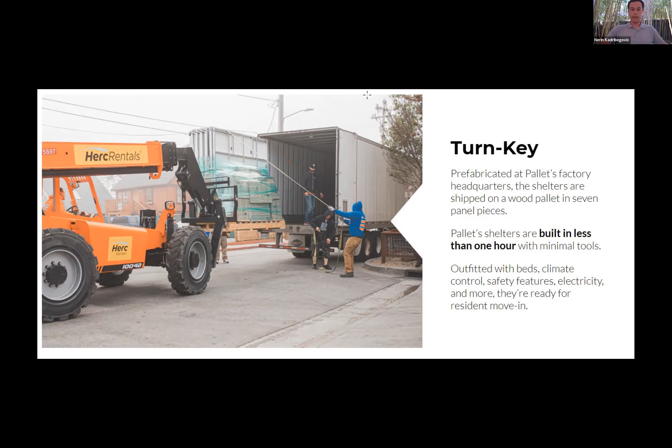Anyway, so going back to the tiny homes. So what is a tiny home? In this case, the tiny home villages are comprised of 60 square foot shelters, produced by a pallet shelter company out of Everett, Washington. They are incredibly fast to assemble—it takes about an hour to assemble one of these shelters. They are very affordable, starting at around $5,000, but you can add additional things to enhance them, such as air conditioning and heaters, and some interior furnishings, which all of our shelters have. They come delivered on a pallet, and come up very quickly.

So what we often talk about is that this company has really captured the sweet spot in between permanent housing and a tent, and even in the way it looks, we often talked about it as sort of monopoly houses, or a child's drawing of a house. It goes back to that primal hut that Michael was talking about earlier.

So this is a cutaway look, again from their website. And they ask on their website, well, where's the bathroom? This is explicitly a shelter. As Michael said earlier, this is transitional housing, not permanent, not a permanent home. So the bathrooms are actually done in the communal style—this is more of a camp.

But you can see, if you look inside, it's 8 feet by 8 feet, with space for 2 folding beds. During COVID times, all of these are occupied by a single person. Other components—you have some storage space underneath the bed, shelving in the back wall, and the critical components are the air conditioner at the top and the heater. The shelf can also double as a desk.

These are pictures of some of our units that are already completed and furnished. They also make a slightly larger unit, about 100 square feet, which leaves a little more maneuvering room inside. We have implemented these not necessarily for habitation, but for storage in some of our projects.

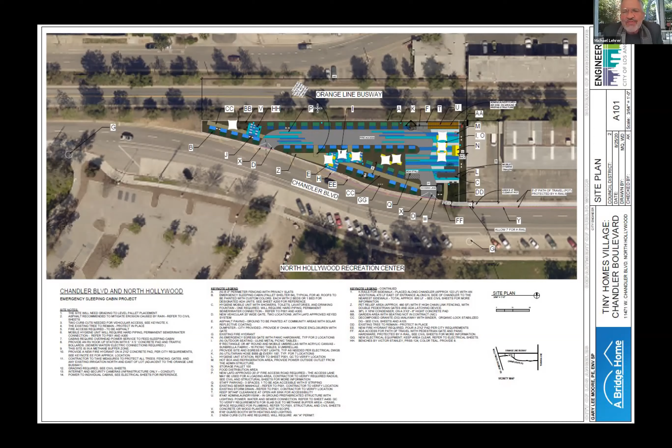I think this as a single idea really exemplifies it - if you want to lose 2 or 3 months to work with the fire department on that, you could save a bunch of money and you'd be finished. You'd begin construction 3 or 4 months later before the project opens. Those are real issues, really important to understand and explain.

So the Bureau of Engineering did all of this work, but they also have clients - in this case the council district and LAHSA, the Los Angeles Homeless Services Authority - and the flow of information between various city agencies is sporadic. So sometimes as architects you get information later than necessary, but they didn't have time to modify it. When we received this, they told us okay, this is it, but the administration trailer actually has to be in the front, among other requirements.

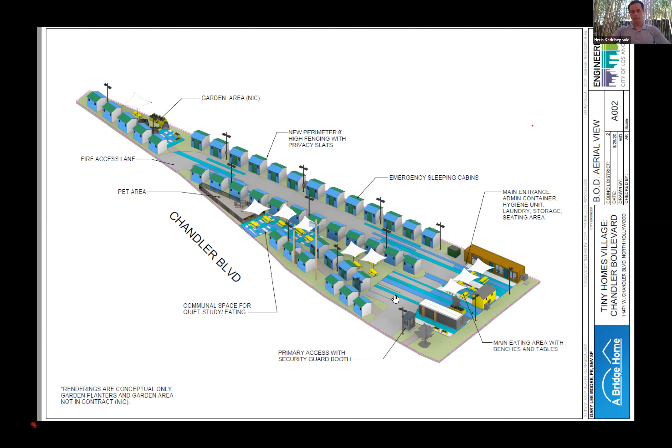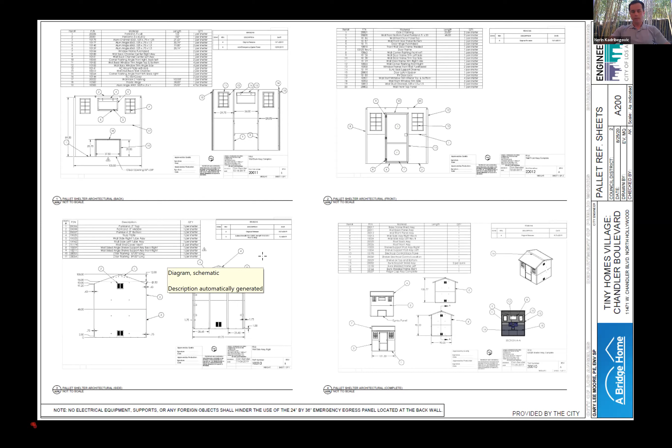In addition to all of that site planning work, these were the drawings that were part of our set describing the pallet shelter. You have to understand, we did not see the pallet shelter in person. We couldn't feel the material. These drawings were all we had. Once we actually looked at them very closely, we realized they're not that descriptive. They don't describe the relationships.

Because solving for accessibility and transitions between units is really important, we ended up having to have a Zoom call with the factory in Washington, where he took a tape measure to the threshold so we could actually design it properly.

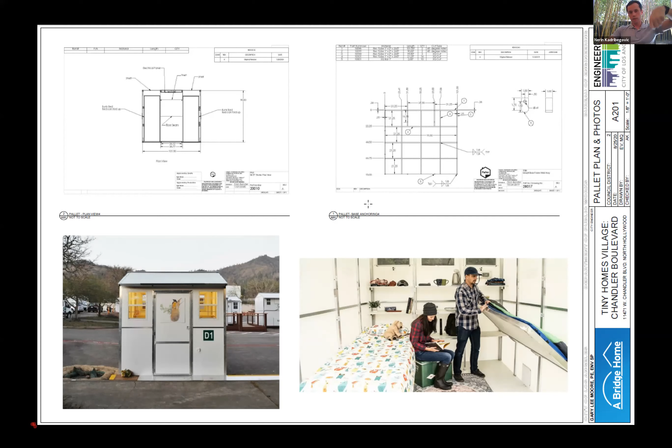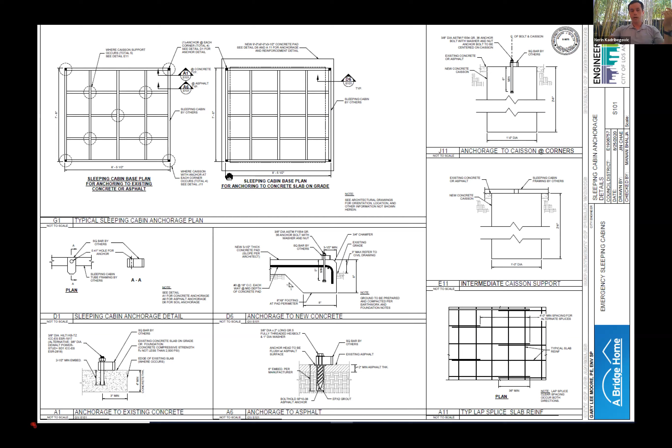In addition to all of those issues, BOE also negotiated with the Department of Building and Safety sets of conditions for foundation work. Our LADBS is very conservative, God bless them. So in this case, this is a foundation drawing — if we were to put it on existing asphalt or existing concrete, we had to drill 1-foot wide concrete caissons every 2 feet apart to put it under, which is very safe but seems like overkill given the situation. In other cases, they allowed us to pour a concrete slab on grade and then place the unit on top of it.

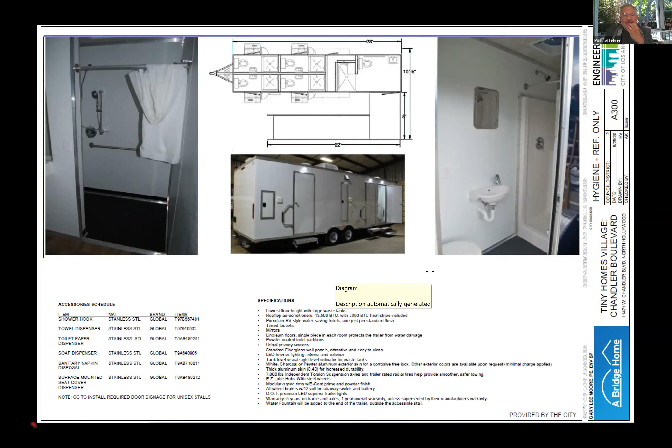Given the extremely fast schedule, we were desperate to get information. We had to move ahead to complete our drawings without actually seeing these units, looking for anywhere we could see them to understand what we had to do. That was sort of kind of freaking out and being desperate on one hand, but keeping moving ahead and being as ingenious as possible to try to figure out what these things actually were.

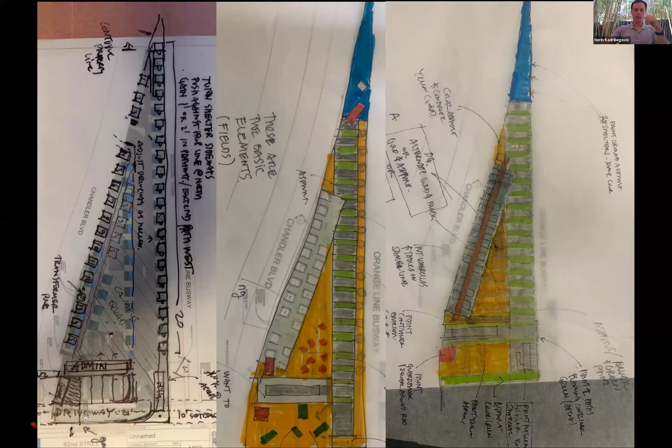So once we understood all of those conditions, we set out to redesign. This is all happening in real time, we're playing around, we're moving things — but the key discovery here was using that 10-foot setback for the driveway, because you can't put a building there, but you can actually drive on it. By doing that, we were able to buy 10 feet on the fattest part of the site, and we were like, wow, 10 feet, that's just incredible. And it opened up a number of other things.

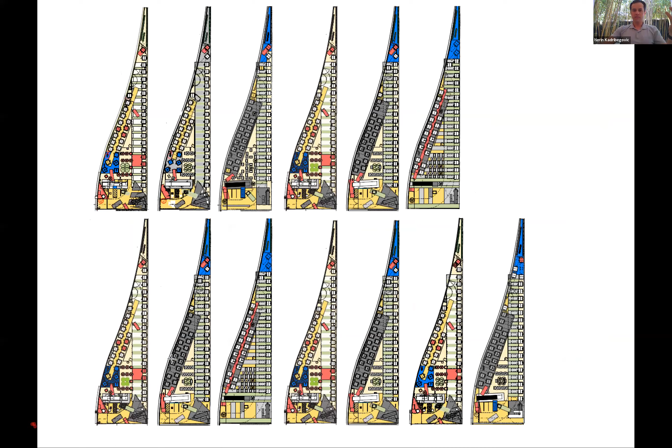And then we did a number of studies, not only color, but each one of these is driven by specific site conditions that we'll talk about a little bit more.

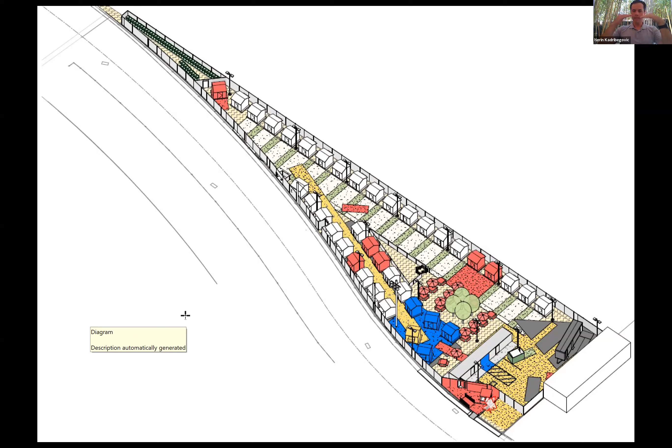Lowering the site by 1 inch, or raising it 1 inch, results in 100 cubic yards of export. So there were countless calls with the civil engineer, Barbara Hall, and our contractor and us, just trying to navigate and find that sweet spot where the export would actually match the bridging documents while still solving for all the other conditions.

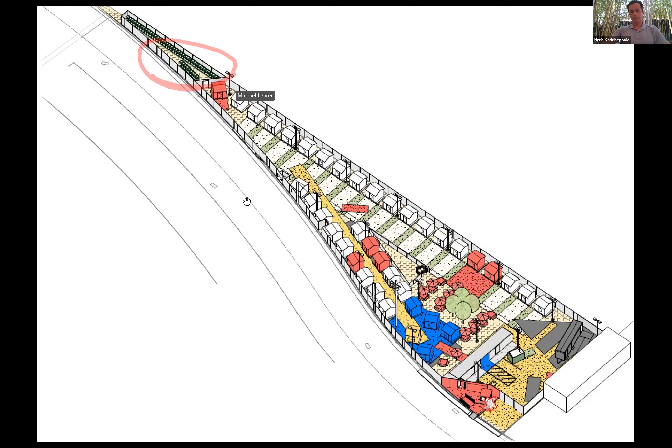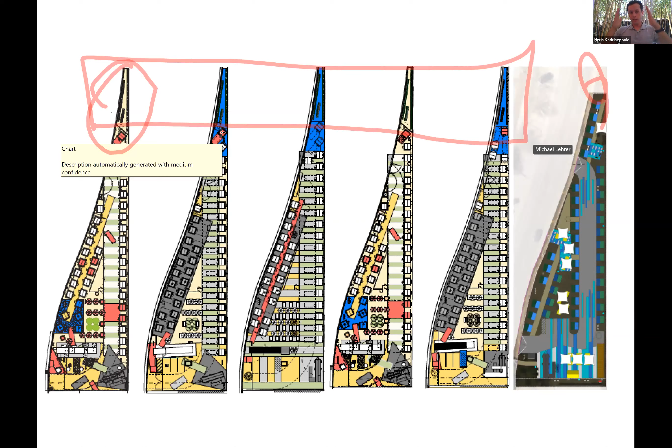This is a drawing similar to the initial one I showed you, and here's Michael showing it. On the left is the bridging document, and you can see it's slightly shorter than all the other drawings. At the end of the process we asked, is this all the site, or is there anything else? They said there's a little bit more to the north, so we used that little tip to put the storage bins in that location.

With the design in place, we were able to move forward, and this took an extraordinary amount of risk. We negotiated with the contractor, and since the city takes a couple of weeks to process the notice to proceed, we took a bit of risk and completed a design before we had the official contract or notice to proceed. We were able to permit the project, working closely with LADBS, the same day we got the NTP.

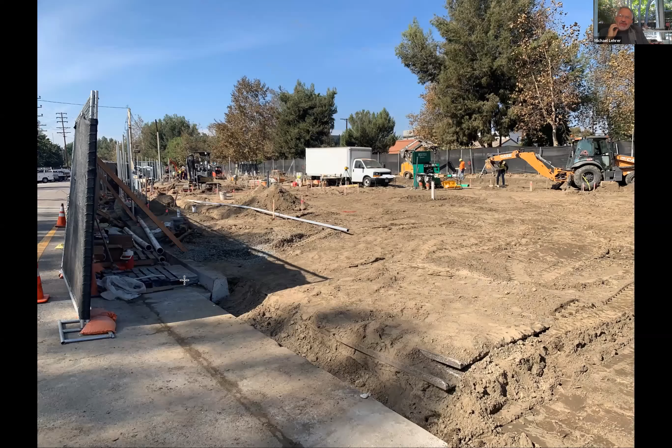So on day one we were able to hit the ground running, with machines on site starting to grade. This was calculated risk-taking and rainmaking, and the upside was meeting, if not beating, the schedule, and relieving pressure, because had we lost days or weeks later on, everything else would have just gotten harder and harder.

So we had the equipment on site working, and this is a really beautiful problem. I don't think if somebody told me I'd linger on this slide and show something like this, I'd have told them they were crazy. But this turned out to be a significant challenge.

This is a portion of the street that had to be taken away because of how the site was located—there was no sidewalk next to it, so a person in a wheelchair couldn't access the site. We had to go back 300 feet and modify the street to the closest sidewalk, cutting the street back and pouring new asphalt with a 2% cross slope to satisfy ADA, while maintaining the existing drainage of the street, which was quite a challenge. That's the gutter that maintains the existing drainage.

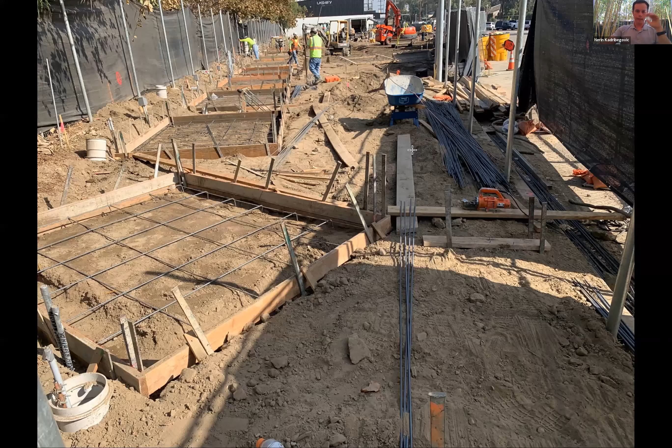But then we had to get from here to the curb, which also required quite a bit of invention, which we eventually solved. That problem actually occupied so much of our brain space at the time.

We were not allowed to put a crosswalk directly across the street to an existing sidewalk, and given the precise location of the entrance on Chandler at that point in the curve, cars are speeding around—it's a long stretch without interruption, so cars go very fast, and it's a little treacherous. So in addition to modifying the street, we had to place K-rails the entire length from the sidewalk to the entrance to protect pedestrians from the cars.

In addition, the closest sewer line to the site was located 600 feet away at the nearest street. All of these things add up and collectively contribute to the cost of construction. The City of Los Angeles has really thought this through—the city has significant experience with lawsuits, so they've taken the time to vet these things and make sure they're done right.

Because let's say we build this in 5 days—in 6 months, nobody's going to remember that we did it in 5 days. All they're going to remember is if something doesn't work, and you're exposing yourself to a significant amount of risk as a public agency.

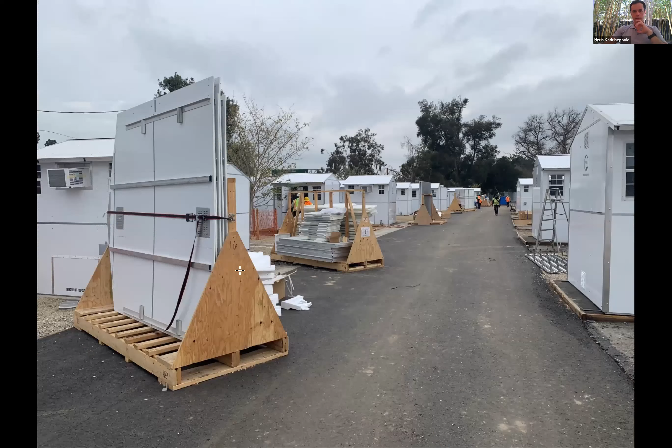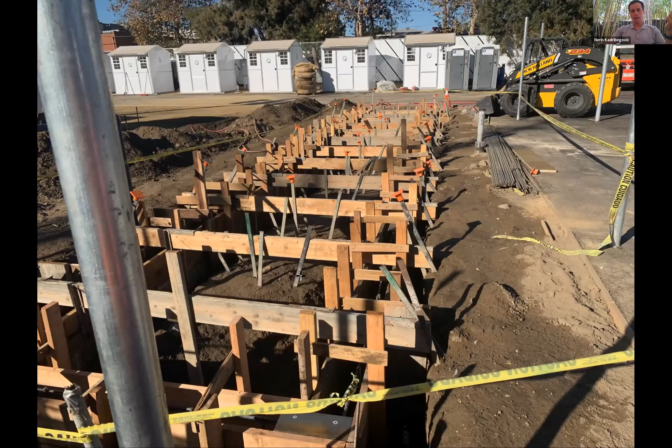Here you see construction moving along—we already have the pads with rebar in them set for the units. This is from a different project, from Alexandria, but I wanted to show how the pallet shelters arrive on the pallet and are quickly taken apart and put together in about an hour each. This is a construction shot of the foundations for the administration trailer.

One of the critical ways we were able to gain space is we decided to take one of the storage units, which also required that 20-foot radius, and convert that and stitch it onto a shipping container, stitch it to the existing shipping container to eliminate a whole 20-foot requirement. So we bought a lot of space with that idea.

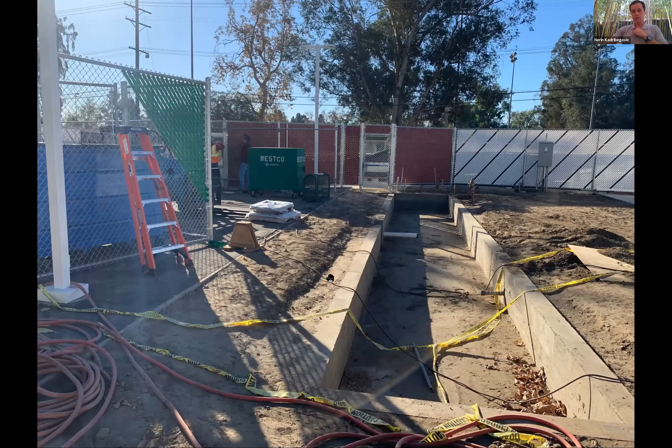This is the foundations for it, which these containers are set in the ground. This is the access space for all the plumbing and everything else down below it. The foundations are, as you can see, on site. Virtually everything else is prefab and brought in.

Again, a shot of it prior to any of the color being put in. The site is graded, the guard shack is in, the hygiene trailer has shown up. Finally, we can see what it looks like in person.

In the midst of all of that, there's an LA Times article that came out right about as we were finishing the project, that painted a picture that wasn't necessarily complimentary to the process. Here we are breaking our backs trying to make this thing happen—us, our clients, the contractor, our consultants—and so this comes out not necessarily portraying a full picture of the process and the amount of time the city actually took to vet all of these issues and make sure it could be completed prior to us even getting the contract to get the project. It's a challenge I think we all face as architects, particularly anything that relates to infrastructure—it just takes a long time, and there are a lot of expenses that are not intuitive.

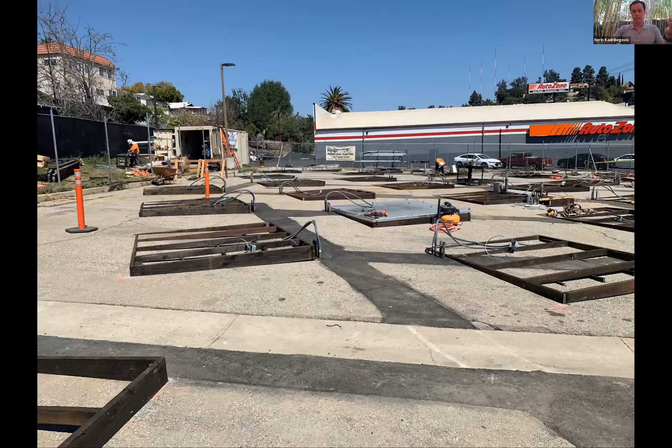For comparison's sake, he compared it to a shelter in Riverside, which was done for significantly less, but the comparison wasn't exactly on point, because this is the photograph of the shelter in Riverside, and the amenities that shelter has are not the same types of things we were providing for our clients.

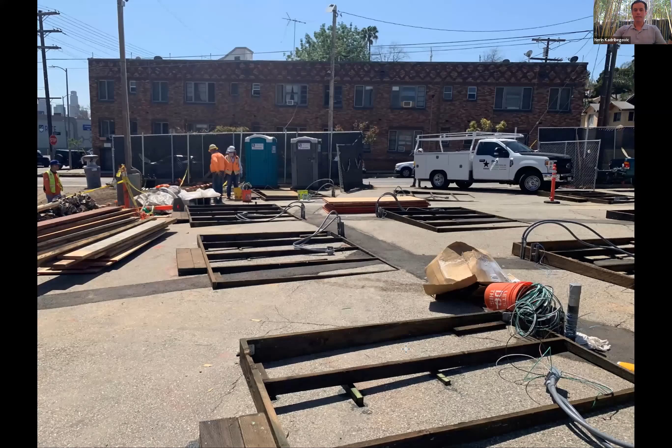In addition, that actually changed the perception also, and I think that Building and Safety, BOE, worked together to alleviate some of the constraints on the foundations. This is actually a project that is opening, I think, within the next week or so in Echo Park that we're working on.

Here we're using the existing asphalt, which you can see the cuts in here for utilities, but we're placing them on these wood sleepers, not using a concrete foundation. So it did push Building and Safety to alleviate some constraints—remember, this is now held down with just a handful of bolts. Originally, the thought was to have nine piles for each of these eight-foot by eight-foot floors.

There was also some talk about removal of colors from our project, which were integral. If you don't have the color, it doesn't add any cost in terms of the asphalt—it had to be sealed anyway, and actually color did add a minimal amount of per-square-foot cost for that. So there was some talk of removal, but the Bureau of Engineering, and in particular the lead of the architectural division, Deborah Weintraub, was instrumental—she understood the importance of having the color in placemaking and making a place of dignity for our clients, and we were able to actually get it back into the design.

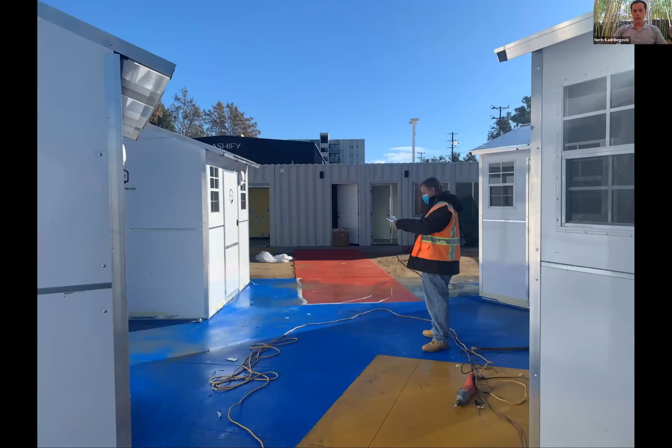I'm going to go quickly through some of these. We did numerous color studies, again shaping arrival, shaping certain parts of the places that had significance on the campus.

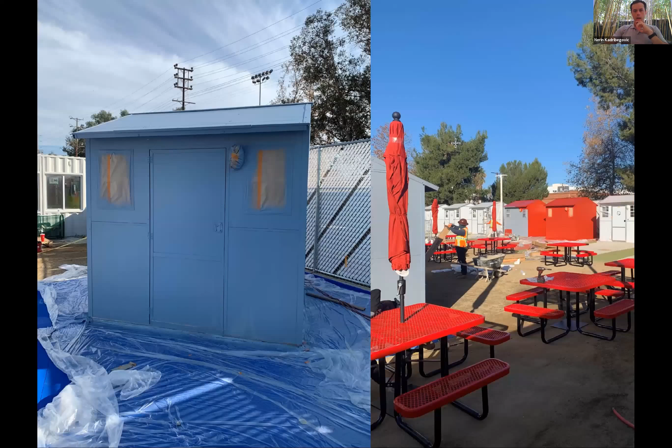The way we think about these things is that the fire lane is the fire lane, but it doesn't really read like a fire lane. It's open space. If it ever gets used as a fire lane, okay, that's great, but most of the time it actually serves as open space.

This is some of the shots of the completed project, where you can see how we've used color to create basically neighborhoods within the larger village. Here you can see how the umbrellas migrate onto the fire lane, and now this is perceived as opposed to the space really feeling like a road. It feels like a city center, and it allows you to recalibrate space.

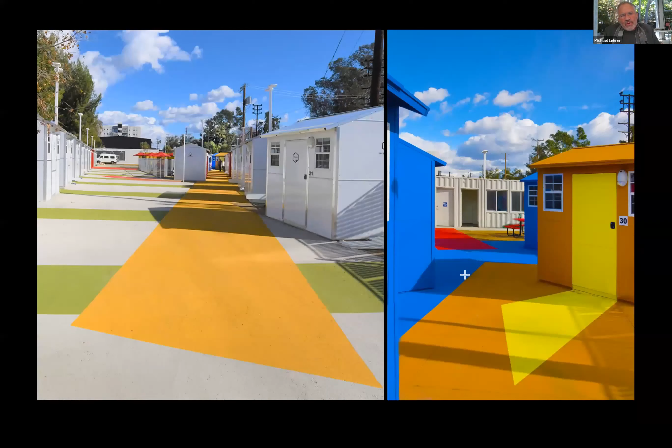We happen to be very focused on the power of the ground plane, which occupies, you can see in this case, over 70% of what the eye sees, and then keep carrying vertical surfaces into horizontal surfaces to change space.

These projects are really wonderful opportunities to play on the musicality of housing and community. I mean, using color to really make vivid larger urban ideas.

In this case, you can go on here in Alexandria. With the success of the Chandler project, and Michael talked about the press around the world that we received, that was really a test. I know I'm coming up on 5 more minutes, but I'm going to go really quickly.

This site was a full, massive deployment of about 100 units, 103, for 200 tenants.

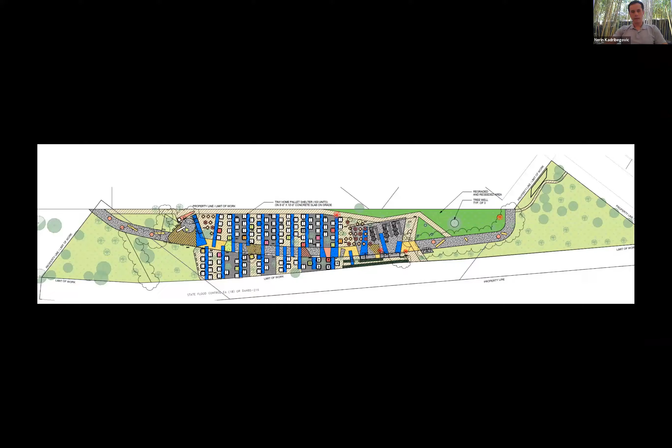Same sort of strategies, but here we had a little bit more. It was set in an existing park, so one of the challenges was to work around the existing trees, which actually created really beautiful little neighborhoods off of the main public fire lane boulevard.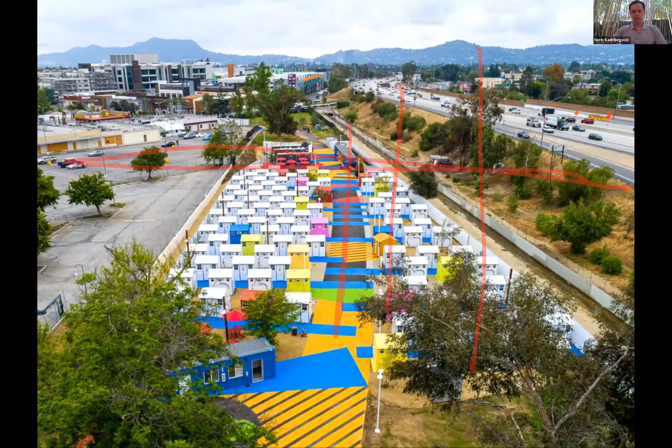We didn't have a budget to paint the entire street, so we were again trying to be very selective about what parts of the asphalt to paint, to animate the main boulevard and the individual neighborhoods throughout. Being that it is in a park, we worked very hard to preserve as much permeable surface as we can. We used decomposed granite and pea gravel, again, to play to the musicality of housing.

In the end, Carolina Miranda from LA Times visited the site with us, sat in one of the beds, and wrote quite a positive story about all of the efforts we've had over the various months.

So, Michael, you want to wrap up?

Yeah, just in terms of when we began talking about the continuum of housing, we're also working on permanent housing. We're doing a whole slew of projects with micro units. These are about 300 square foot units.

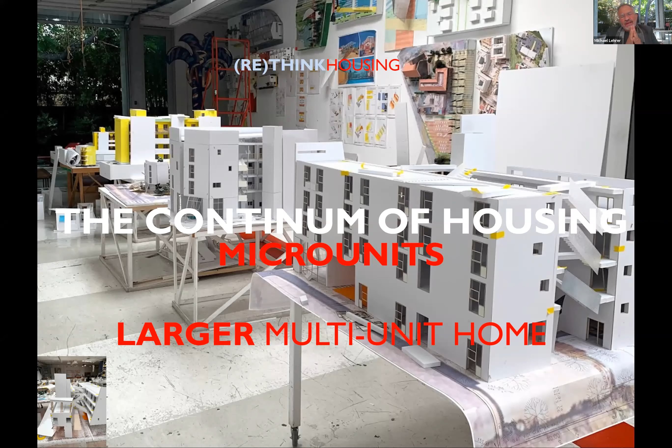If only the city agencies were capable of working even a little bit faster on these. These are pretty much business as usual, which is very, very long-winded. But these are permanent, and each of these projects informs the other.

What's really encouraging is that our partners in terms of paint suppliers, this company Street Bond, has been so forthcoming. They've actually given us a discount on the color so that we can use more in the designs. They all understand it's all for a good cause, and they're all willing to contribute.

So from the general contractors, subcontractors, and the paint suppliers, we're all sort of in it together, and we're all contributing to the greater cause.